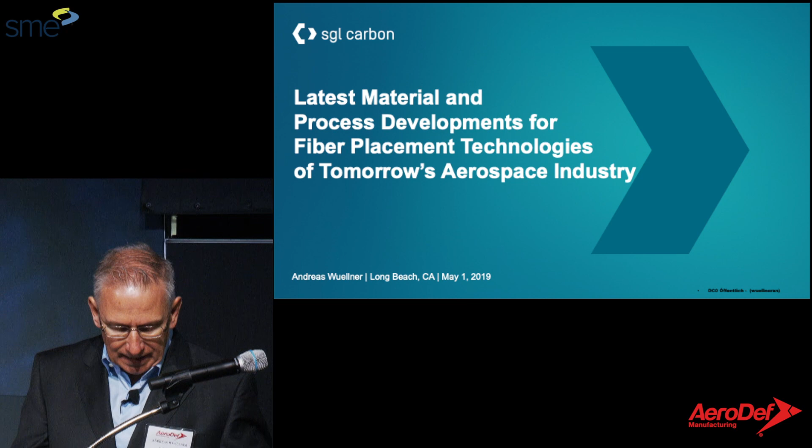A few words on SGL Carbon and us before I dive into this topic. What sets us apart from our perspective? We believe that it's really important not to have just carbon fibers in-house and the materials, be it textiles, thermoset, thermoplastics; you also have to have the component capabilities and the capabilities to manufacture in high series volumes. That's important. You cannot just throw a material over the fence and somebody will pick it up and make a part of it. This won't work. That's something we have experienced and learned over the last years.

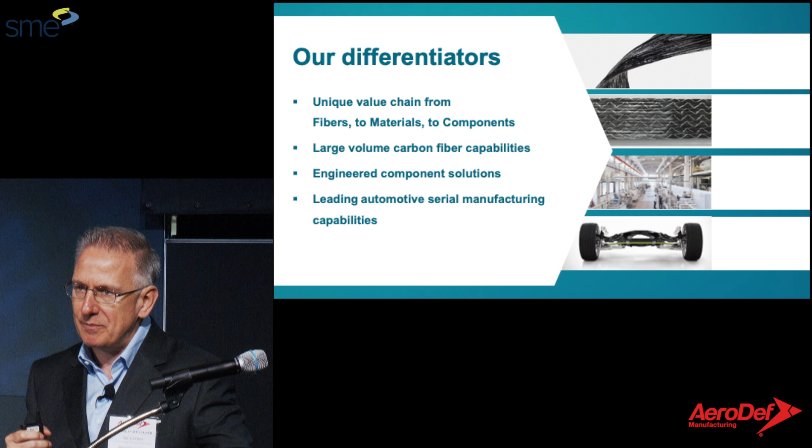We have large volume carbon fiber capabilities. We are among the top 5 carbon fiber producers in the world. We have the engineering and development capabilities in place to develop materials and processes, but also do the engineering work to come to a solution for our customers. And what we are really proud of, we prove daily that we are capable of manufacturing parts in series. The part you see here is the leaf spring, and we're manufacturing for customers more than 500,000 of such springs in standardized manufacturing cells per year. So that's a really serious application.

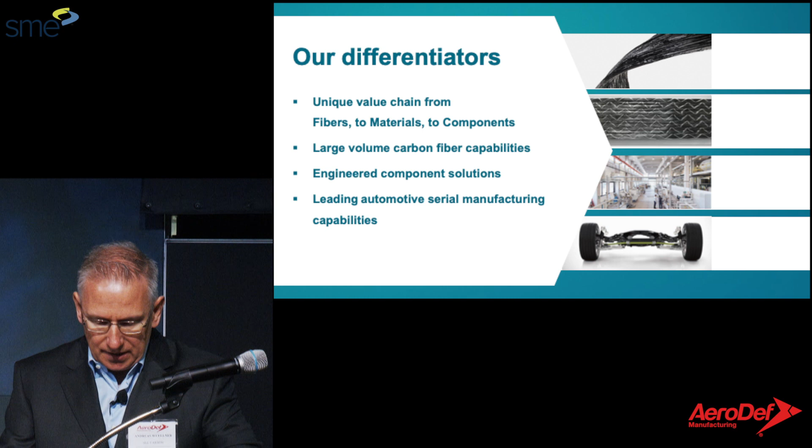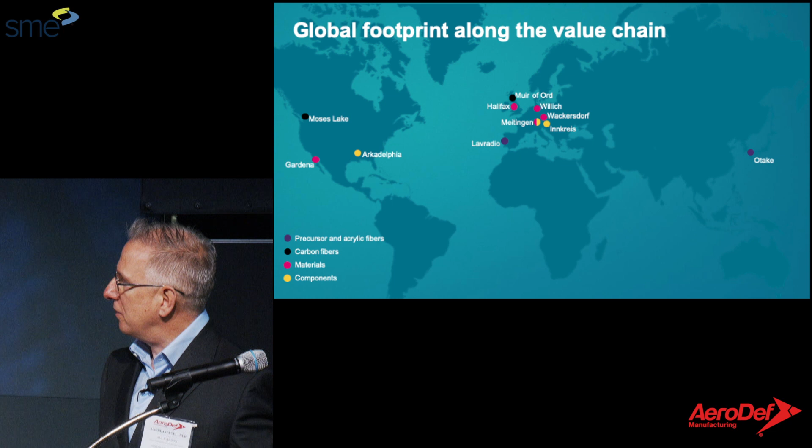SGL Carbon, our business unit, our division, has a global footprint, and as I said before, that starts with the fibers, or it starts with the precursor. Those are our precursor sites. Then we convert those into carbon fibers in Muir of Ord, Scotland, and Moses Lake, Washington State, the plant we started up in 2012, at that time still with BMW. Now it's our plant, and from there, our fibers and also glass fibers are converted in the red dots into materials, and then either sold or converted into parts.

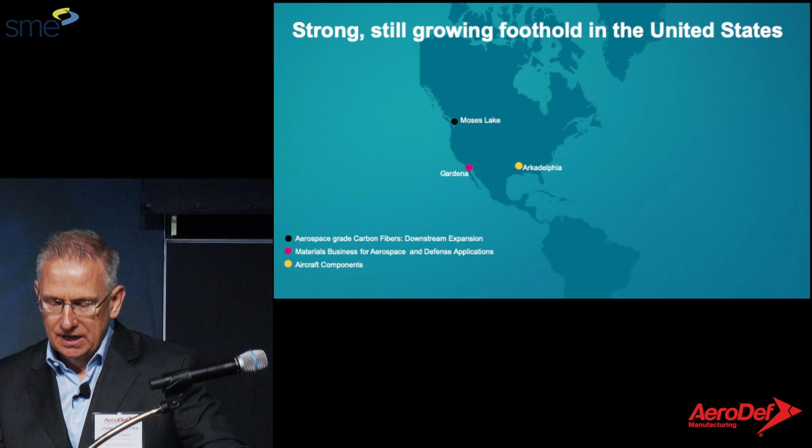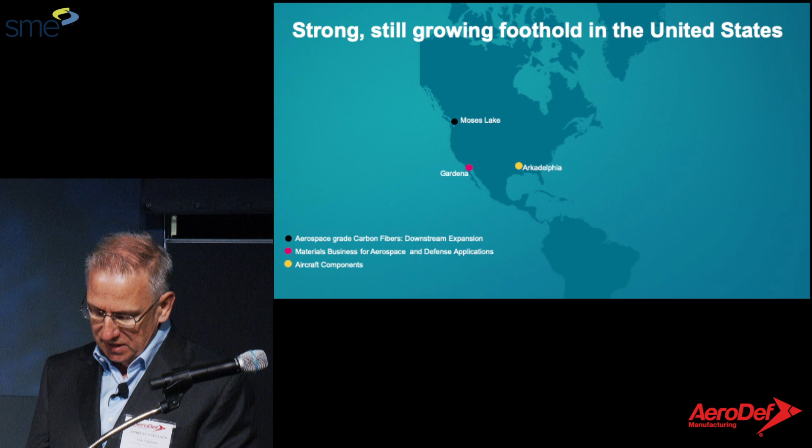In the US, we do have a foothold of 3 sites, one here in Gardena, another one, as I said before, in Moses Lake, and in Arkadelphia. And we will grow this footprint. So that's also a reason for our participation here. We want to grow in the United States. We are currently a $500 million US dollar sales business unit of SGL Carbon.

Okay, let's dive into the materials now. When you talk about composite components, when you talk about fiber reinforced plastic, it's always a combination of the materials, the process, and the engineering. And you have to have all of these in place, otherwise it won't work, and you have to select the appropriate ones.

The materials you see here are parts of our dry textiles toolbox. We always try to develop standardized toolboxes, because otherwise it gets too complicated for us and for our customers. And hence we have started to develop this toolbox, starting with fabrics, non-crimp fabrics, woven fabrics, most cases thermoset. For thermoset applications, we have developed a so-called FixTow material, which we will see later.

That is a material we have developed for thermoset fiber placement applications, non-wovens, which also go into fiber placement, and of course stacks, braidings, and preforms, and we will see those also later on, especially the braidings, which will play a role in future as well.

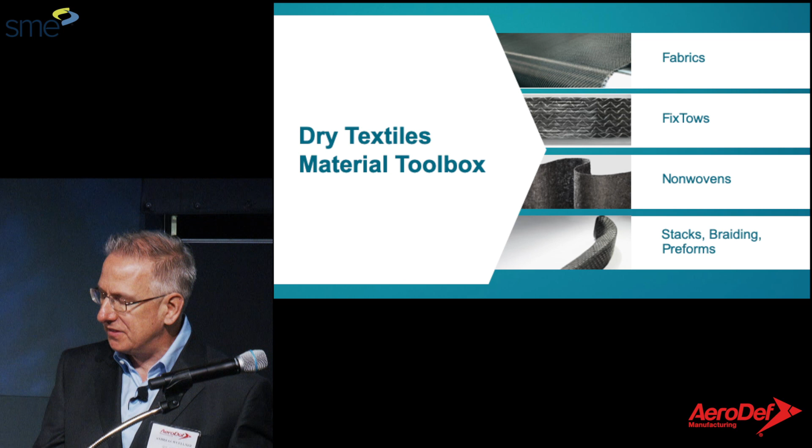That was basically the starting point for us, and from there we developed the thermoset material toolbox, which is, well, when it comes to prepregs, of course, state of the art. But we took this and developed, based on the prepreg technology, towpregs, which are not a slit tape, but we take basically a carbon fiber, we impregnate it right from the beginning, and re-spool it, and make a towpreg out of this, which then is used for fiber placement processes.

In addition to that, we also have pre-impregnated carbon fiber non-wovens. Those materials stem from the supply chain we have for the automotive industry, and those are basically off-cut materials we take and make non-wovens from those. And then we have stacks, and stacks are basically multiple plies of material we put on top of each other, trying to minimize waste right from the beginning, and which then can be put into fiber placement machinery and further reinforced.

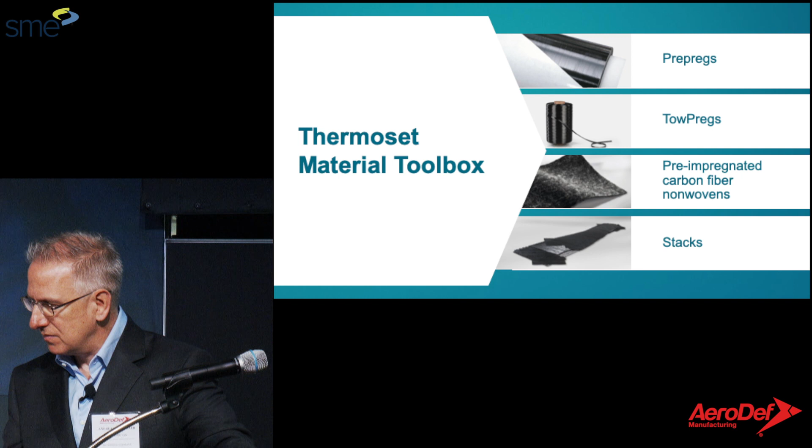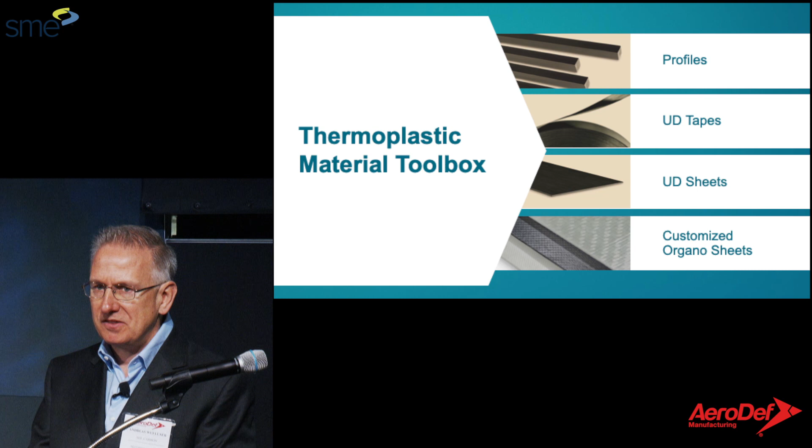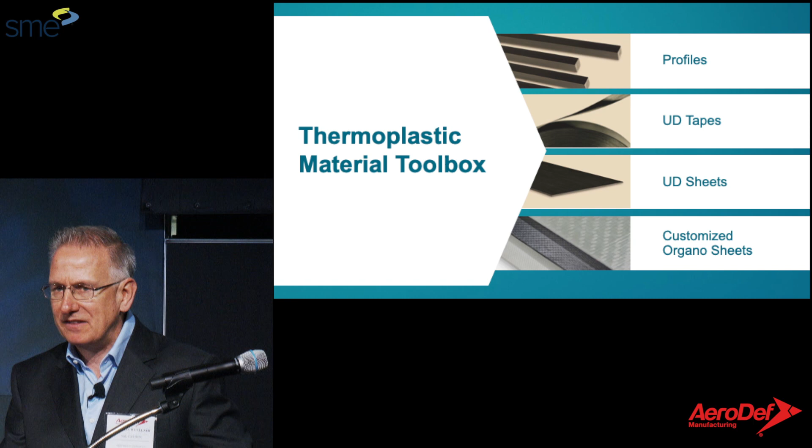So that's another material class we have developed for fiber placement applications. And those are all the basis for fiber placement. So you have to have in place such standardized materials, because otherwise it gets too complicated and you lose sight basically on what you're doing.

As I had said before, for applications where you have one part, large volumes, there are already processes out there. We have those in-house, but when it comes to smaller quantities, much more complex geometries, it gets more difficult, and the waste increases exponentially, and that is really the critical thing with all the applications.

We can compete with our materials, be it glass fiber, be it carbon fiber, be it hybrid materials. We can compete when we minimize the waste. And this is, for example, the case with such glass fiber reinforced plastic leaf spring applications. But when it comes to complex geometries, small volumes, it's totally different.

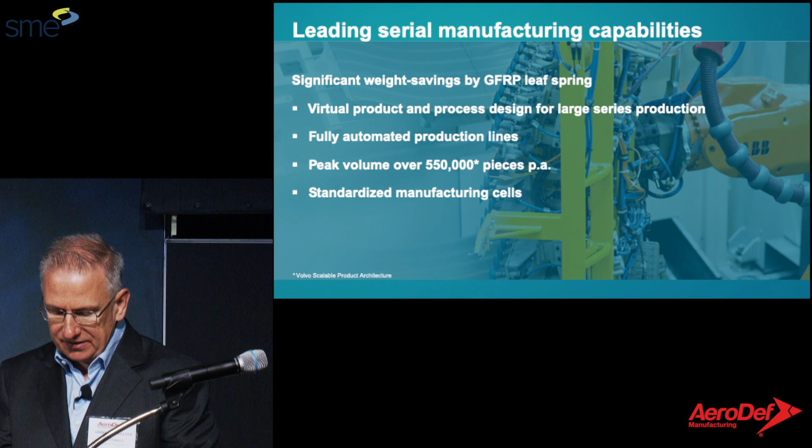And to give you an example for that, that's an example taken from a real-life project we had in the past with a large German automaker. They started with a steel solution, and then they wanted to have a lighter solution, and ultimately, because of cost, they ended up with this aluminum solution. However, we went through various iterations, and those involved fiber placement technologies, and that was basically the starting point for our efforts to think more about fiber placement than we did in the past.

As I had said before, we came from large volume, large parts, either made from wet pressing or high pressure RTM, complex tool geometries, expensive tools, a lot of waste, and we wanted to reduce that. And so I had to start thinking about what can be done. And in the first iteration, well, that was the simple approach: make everything from carbon fibers in the way we did that for other applications. When you look at it, you save a lot of weight, which is great. But when you look at the cost, you triple the cost of the series solution, which is of course not acceptable for the OEM.

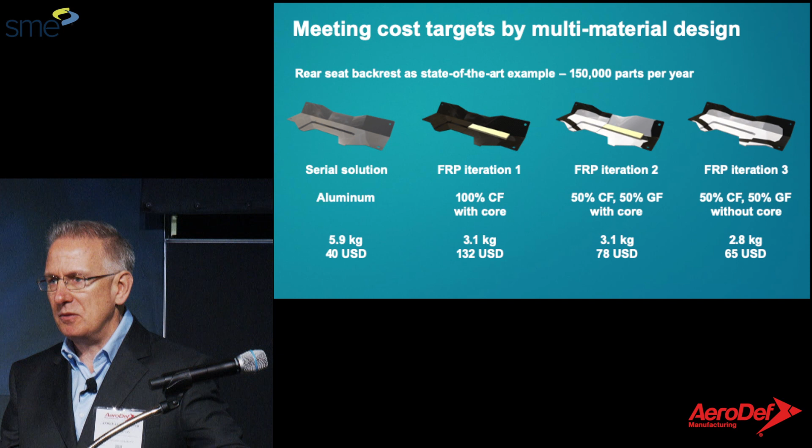Then we looked at it in the next iteration step, and that gives you a feel for the competencies you have to have. You have to have the material competencies, and you have to have the engineering competencies in-house to go through this. We came up with a hybrid solution with a core, 50% carbon fiber, 50% glass fiber. But this was still too expensive.

And the next step was to get rid of the core and make more use of carbon fibers in some specific regions of the part, look at the load paths, and minimize waste again of carbon fibers, but really make the most out of the carbon fibers. And you couldn't have done that with standard processes. And that is a way of thinking. We believe that combining multiple materials and also technologies.

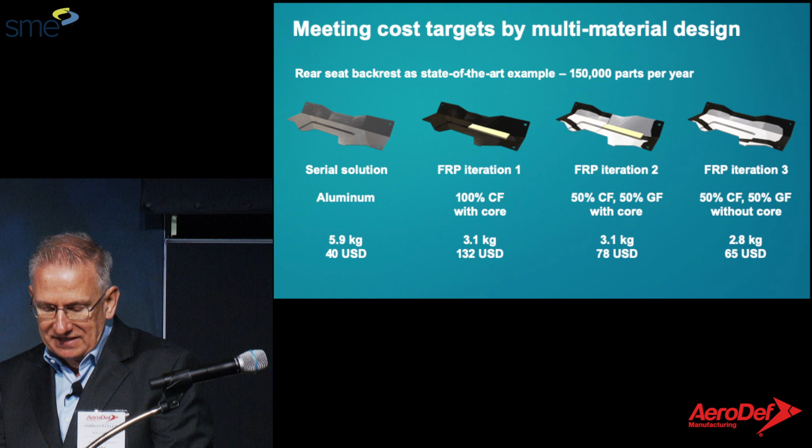So this is a combination of non-crimp fabrics, glass fibers with fiber placement on top of this. And this is something that saves you weight and also reduces cost. So that's a good approach, but it's very complex and very complicated, and you have to

State of the art is a standard approach of using carbon fibers here, making everything out of carbon fibers. But when you compare the cost, it doesn't work out. And with several iterations, you lose some properties, but it's still good enough, and you end up with such a hybrid solution with fiber placement. So that's a good example of how we think and what we want to bring to the aerospace industry as well.

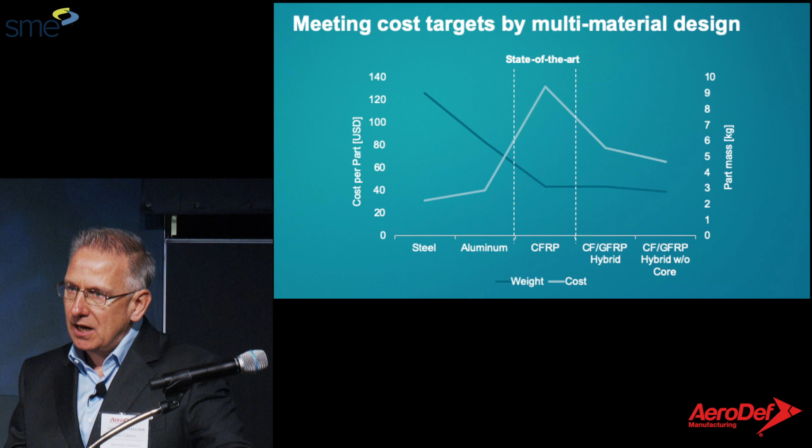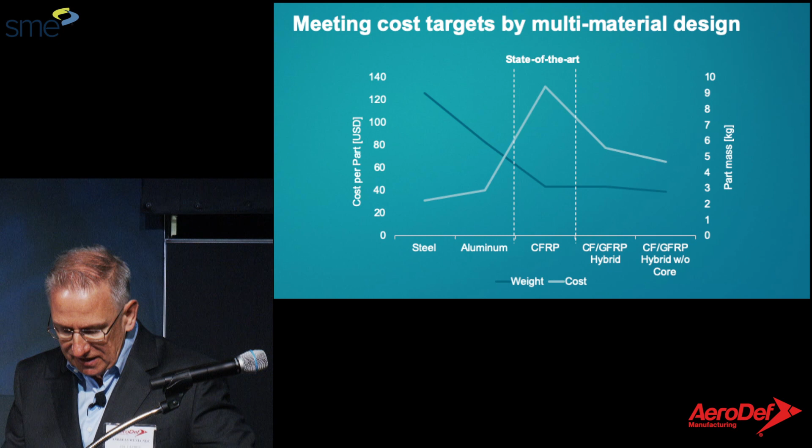That thinking that we can combine several materials, and not only for huge structures as had been done with fiber placement in the past, but do local reinforcements as well. And why is this important? As I said before, the last time I talked about what is happening to commercial aircraft and how we could utilize what we are doing within SGL Carbon in future aircraft to replace our autoclave processes and to make, for example, wing structures with out-of-autoclave infusion processes.

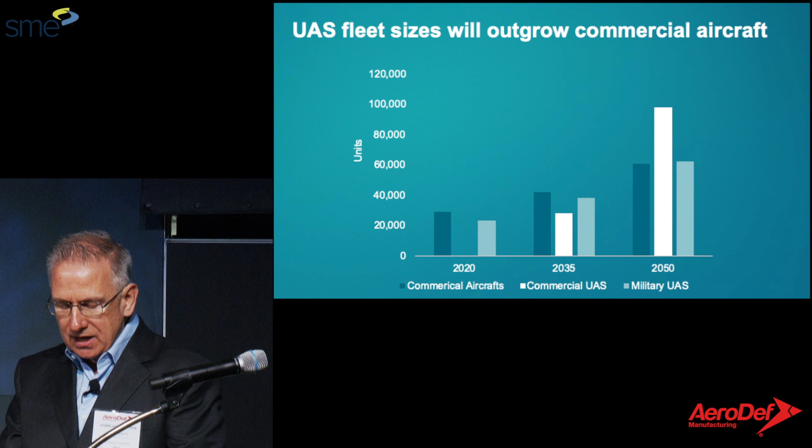But in future, when you look at the developments here, you see that unmanned aircraft systems will outnumber commercial aircraft on a global basis real soon. Now mostly in defense applications, but in future in commercial applications as well. And when you look at what such air taxis look like, unmanned aircraft systems don't have huge structures, huge flat parts. Such parts are round parts. You have a lot of curvatures.

You have, for example, when you look at the doors, a lot of glass. However, you have to reinforce that, and hence you are not able to do something there with standard approaches like we did in the automotive industry. You would have a lot of waste here, and that would make such parts so expensive nobody would utilize fiber reinforced plastics here.

For example, these parts here could be made from braidings. You could have fiber placement for such structures at the doors. So there are multiple areas for such air taxis where carbon fiber reinforcement with fiber placement processes may be utilized in future. Hence, we think this is really a technology, with the further developments we are going into, that should be used in future.

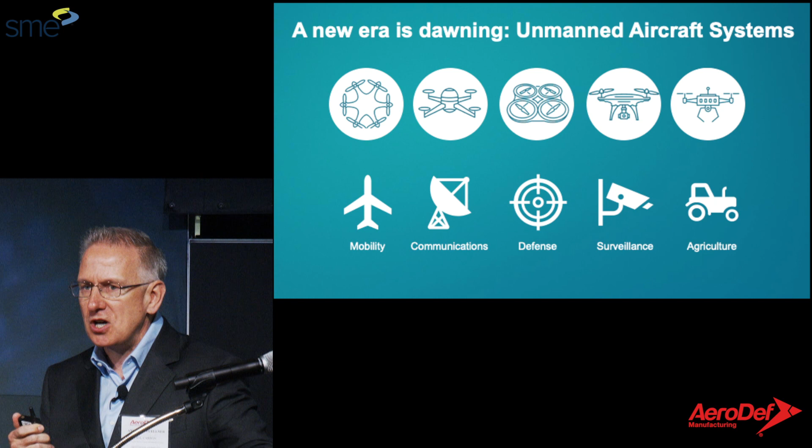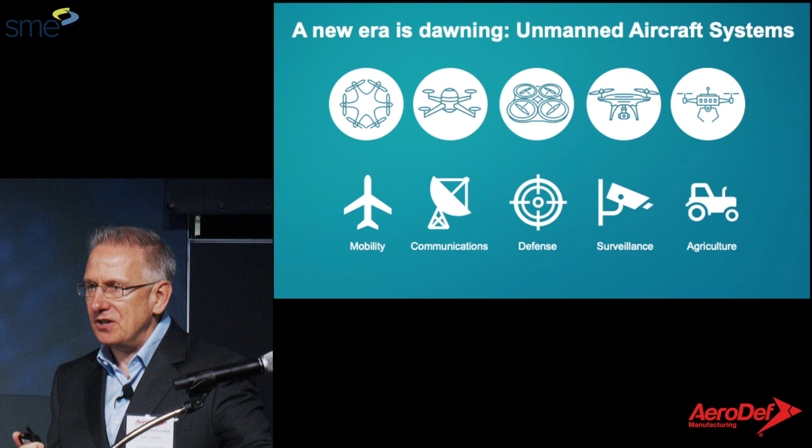And when you look at the different applications in mobility, communications, defense, surveillance, and agriculture, the variety of such drones, unmanned aircraft systems, is so huge that you do not always talk about huge volumes. You talk about limited numbers, maybe hundreds, thousands of aircraft, but that would not allow for very expensive toolings. Hence, you have a huge advantage here with fiber placement technologies.

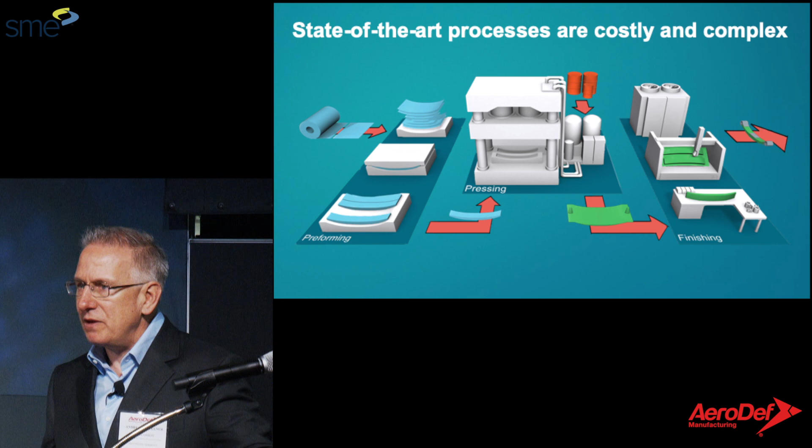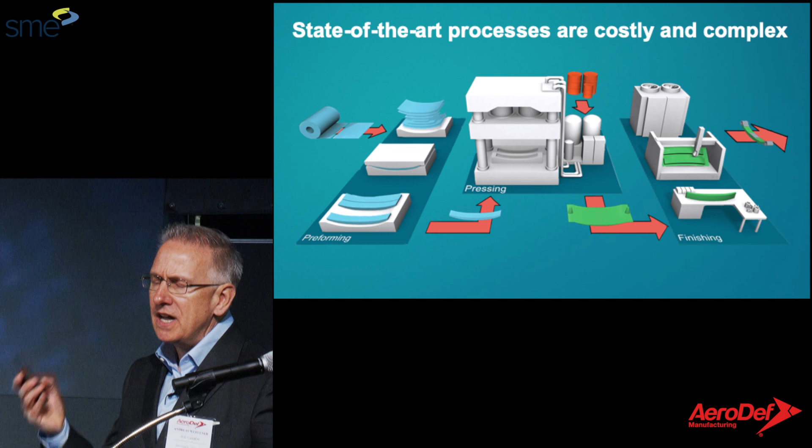You have separate cavities, and then you have to separate those from each other. But this is really standardized, high series, not a lot of variation in there. When you want solutions for smaller volumes and just local reinforcements, you have to go a different route, and that's what we are showing here: either our automated fiber placement processes or another process which we call freeform winding. You take a towpreg and wind the specific geometry with a robot.

So these are specific processes which use our towpregs here, and the towpreg is a thermoset resin system, and you make the part, and afterwards you cure it. It's a fast cure resin system. You don't need the expensive high pressure RTM molds. You save a lot of money in that regard.

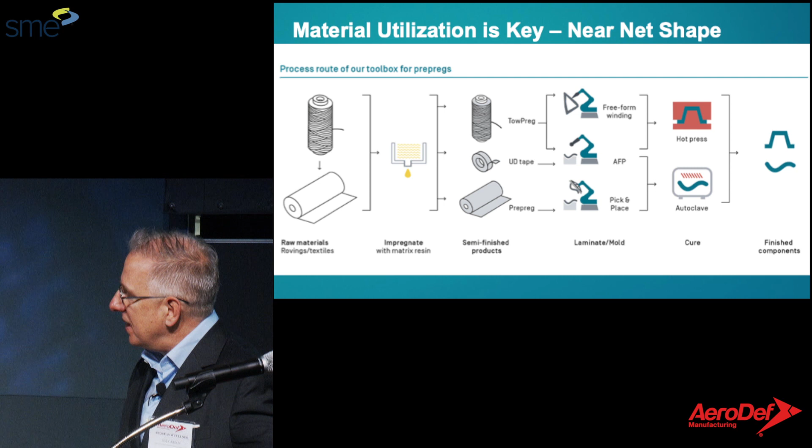And with the towpreg, because of the process here, when you impregnate the fiber and don't have a backing paper on the towpreg, you save money there as well. And it's a very nice process and a nice material for those two processes here. However, here you see the standard process, which is state-of-the-art with prepregs and pick-and-place operations, autoclave technologies. So we believe that this here is the future for applications as we have seen before.

And when you look at this manufacturing setup, you see it is much easier, much simpler. You have the fiber placement equipment. You take either the UD tapes or the towpregs. You lay up the parts. What you see here, you have those parts where you don't waste the material, which is really important. You don't have a stack where you waste maybe 80% of the material afterwards. You lay up the fibers where the fibers are needed.

And then you have a simple press, which is standard state-of-the-art technology. You don't have to deal with high pressure resin transfer molding, which is very complicated, and so that makes it a lot easier here.

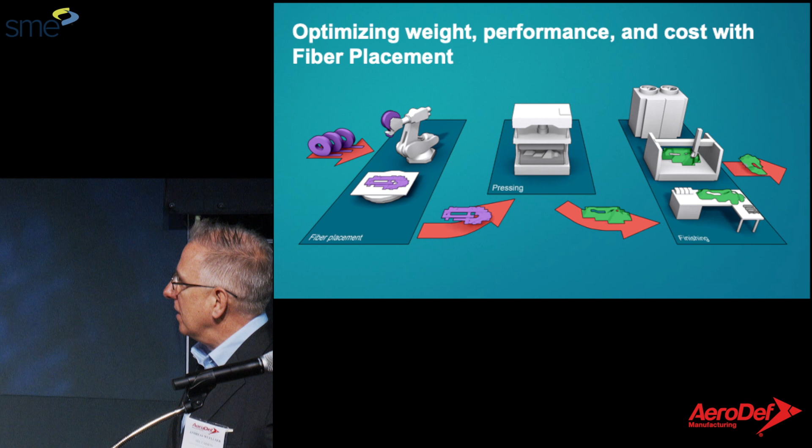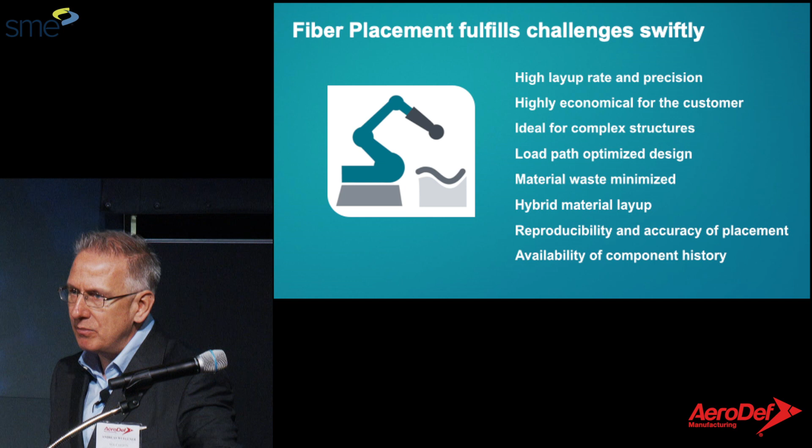And when you summarize the advantages of the technology here, it's really the high layup rate. So the parts I have shown you can be manufactured below 10 minutes or so. That's relatively fast for such parts. The backrest, for example, of a car with high precision. When you pick the right process, the right material technology, it gets economical, but that's a prerequisite. You have to pick the right processes and the right materials.

It's ideal for complex structures. It can be 2.5D. It can be really a complex 3D structure with inserts, with metals. So you can have various materials and parts integrated into such a fiber placement component. Of course, it's load path optimized, and that's what it's really about. Make use of carbon fibers where it makes sense. You minimize the waste, and I've said that multiple times, but that's really the most important thing.

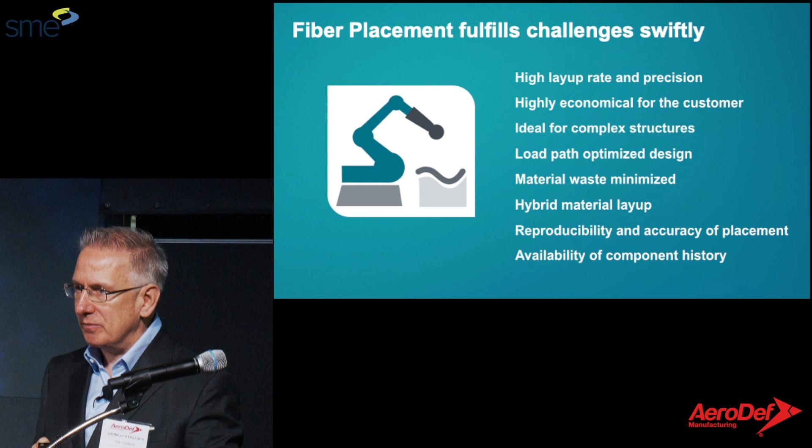You have the opportunity to do hybrid material layup, combining even metals or glass fibers, carbon fibers. And of course, the accuracy of the placement is very good, the repeatability, and you can, of course, log all the information. You have the history available when it comes to virtual processes. Now I show you a movie on what we do in our fiber placement center.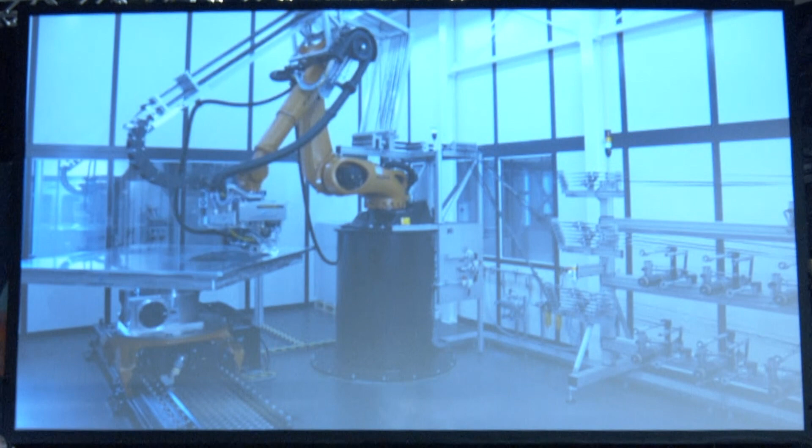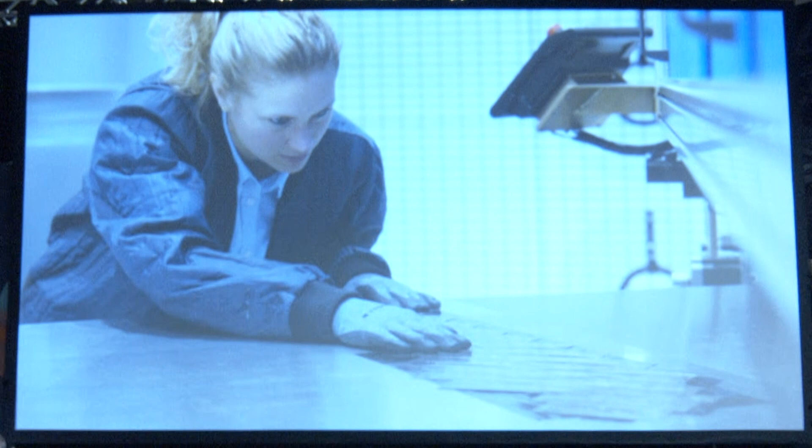Automated, load path optimized, material efficient layup and cutting of fibers plays a key role in industrial mass production. To incorporate this technology into more high-volume applications across industries, SGL Carbon and Fraunhofer IGCV founded the Joint Fiber Placement Center, with multiple locations in Bavaria, Germany. With different high-tech machines, our customers can develop production concepts for fiber placement technologies.

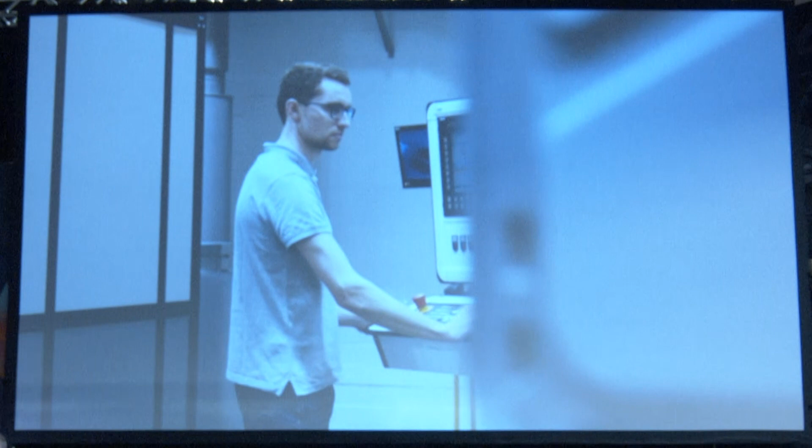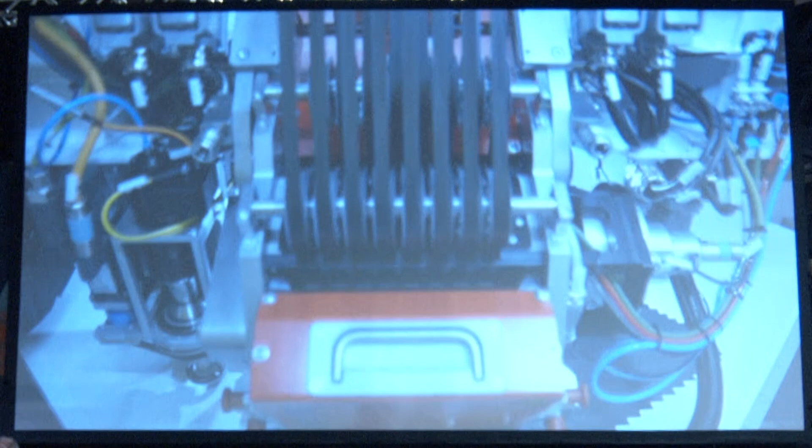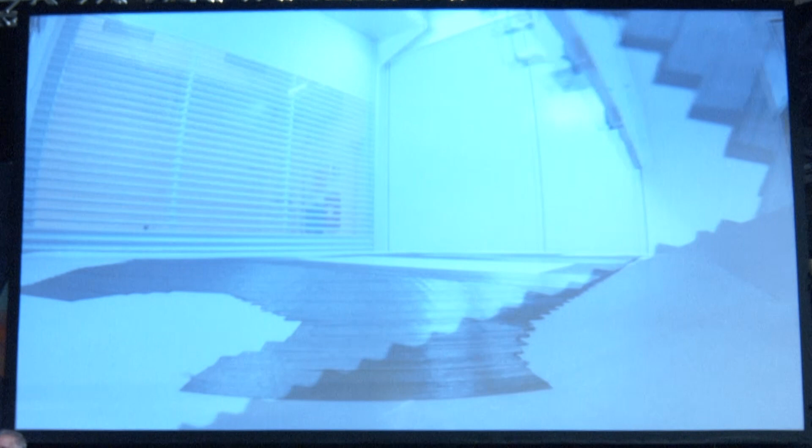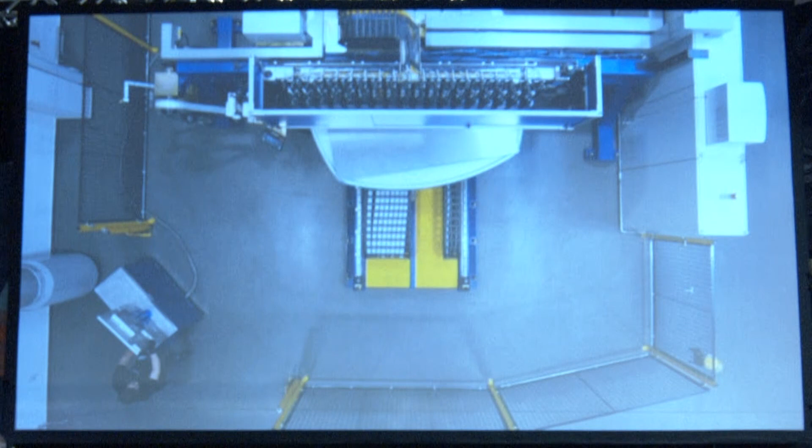Specially developed for mass production, the CNC-controlled Stax Compact 1700. The machine enables towpregs and thermoplastic tapes to be automatically and reproducibly routed away from the spool, very close to the desired final contour. The FiberForge Relay 2000 is a tape-laying system for advanced thermoplastic composites. The system allows for different material combinations and widths, and manufactures tailored stacks highly productively.

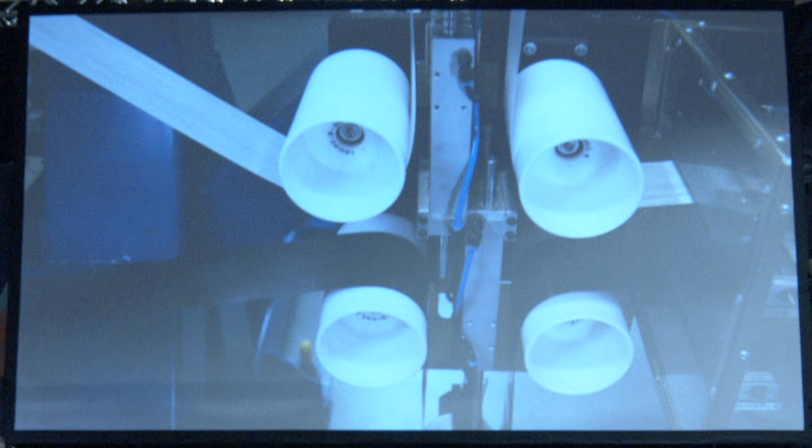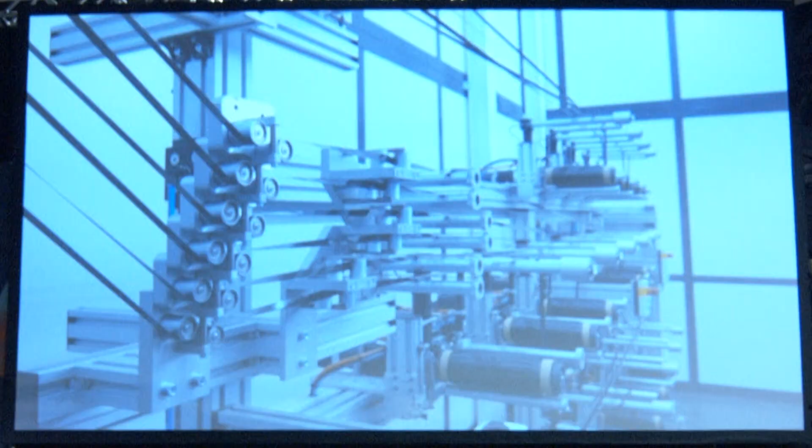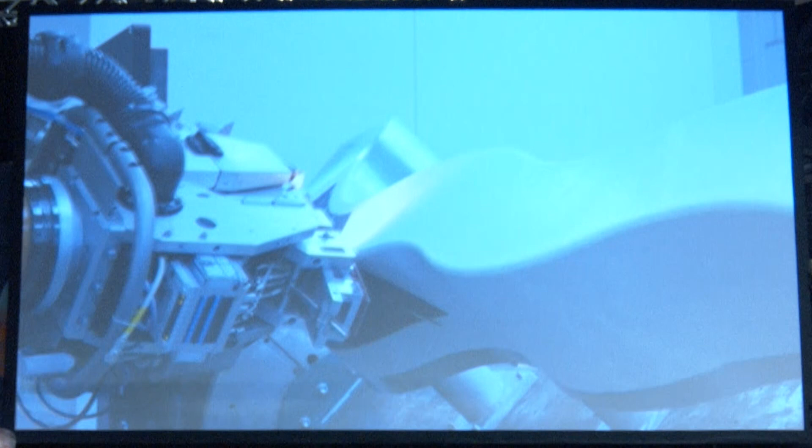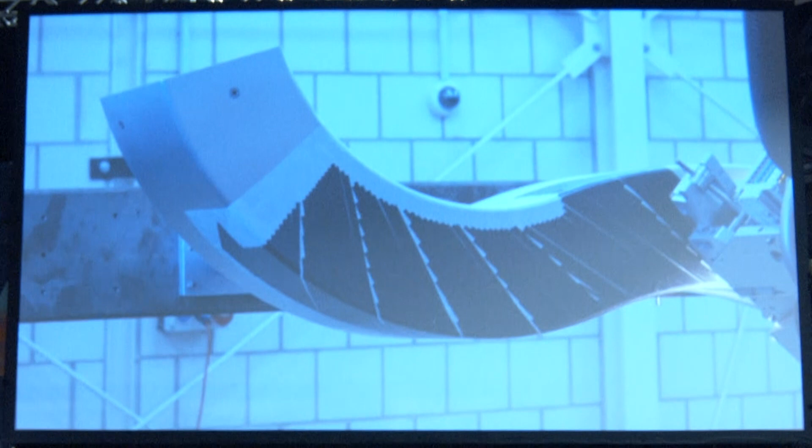For the layup of thermoplastic tapes, the Compositence RoboMAG is a robot-based machine. The material is only fixed on the edges of the part geometry, enabling fast processing speeds and high layup rates. This machine enables multi-material processing of thermoplastic tapes, towpregs, and dry fibers. The Coriolis Composites C1. It is suitable for 2 and 3D part geometries and features load path optimized layup of composite components. The Fiber Placement Center, developing solutions for innovative manufacturing.

In 2016, we started to think about setting up something like the Fiber Placement Center. And we did that because we became aware of the challenges here. And the challenges were really selecting the appropriate material and doing all the engineering work, doing the in-process control, doing the programming side, the CAD/CAM. All of this was quite challenging, and we felt that there are quite a few innovative solutions out there, but when you go to one of the machine suppliers, you get one solution, and of course this solution is being marketed as the most appropriate solution.

However, that's not the case, and hence we said together with Fraunhofer IGCV, it may make sense to form an alliance here and really get all the existing technologies, combine those, and give our customers, our partners, the opportunity to look at such technologies and compare the competing technologies, and learn from us how they can find a solution for their specific challenge.

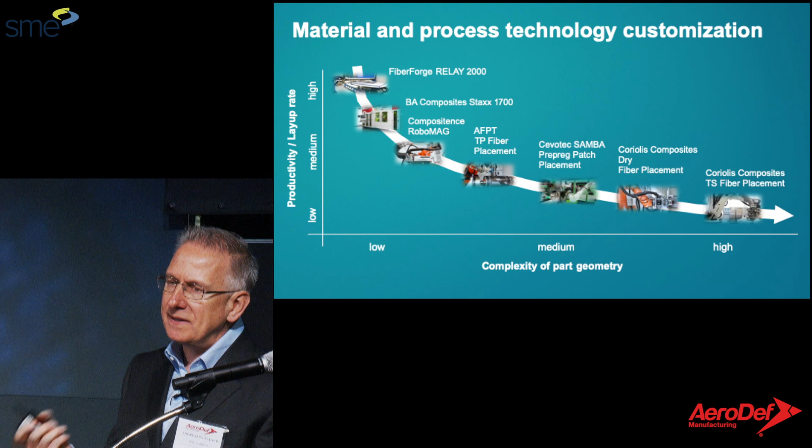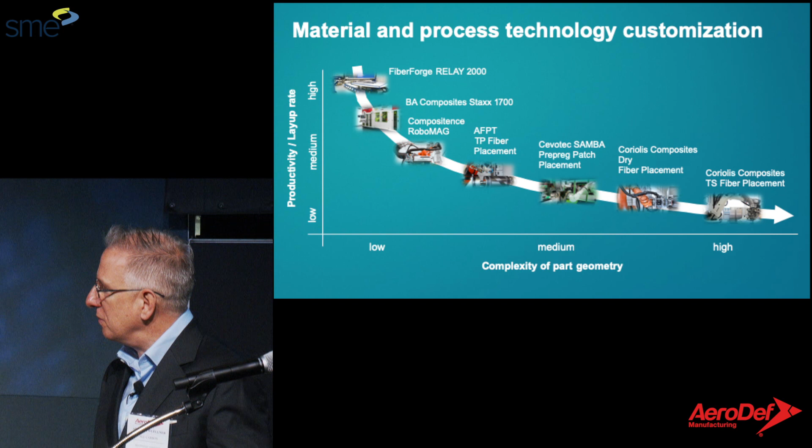And think about as a user, you have to make a decision which equipment to choose. It's really difficult, and that is the reason why we said it makes a lot of sense to bundle our competencies here and to offer this to the customers. This is really, we believe, a good approach to demonstrate how fiber placement can be used in future, and in particular in applications like the aerospace industry with unmanned aircraft systems.

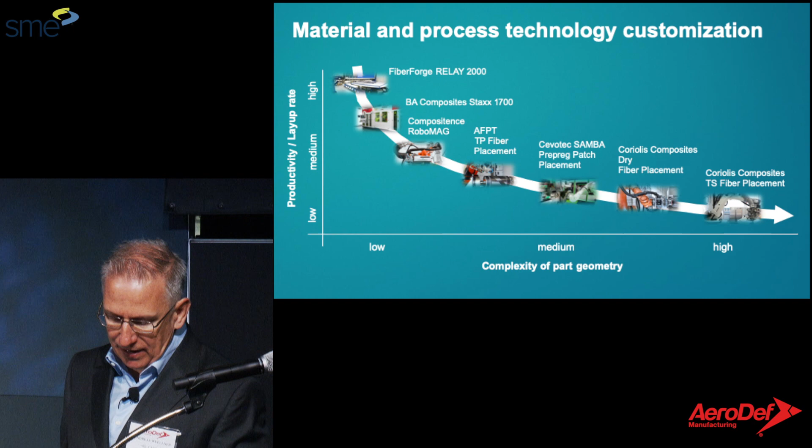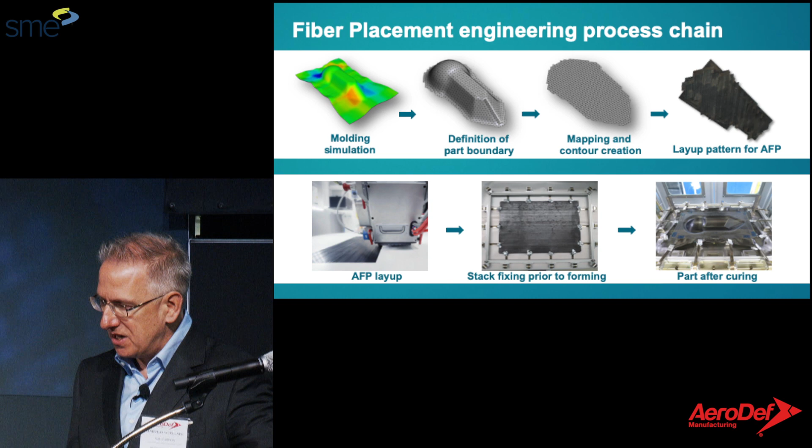Of course, you may not forget about the engineering process chain, which is very challenging as well. How do you get from a part design to basically the layup pattern? And that is very challenging since most of the equipment suppliers offer their specific solutions, but those are proprietary solutions. That's definitely a challenge for the future to come up with more standardized solutions there in order to not only have the virtual chain, but also have it in reality then. That's something you have to manage. You have to do the entire design and engineering process.

And we believe that you have to master 3 different parts of the equation. That is, of course, the material toolboxes. Hence, we have set up the textile, the thermoset, the thermoplastic toolboxes. You have to add the engineering competency, really coming from the concept study, going through product design, the analysis, the prototyping, product testing, and you have to have the component processes in place. These are processes we have in our Lightweight and Application Center, and here such processes in the Fiber Placement Center. And you have to do this in order to meet the requirements.

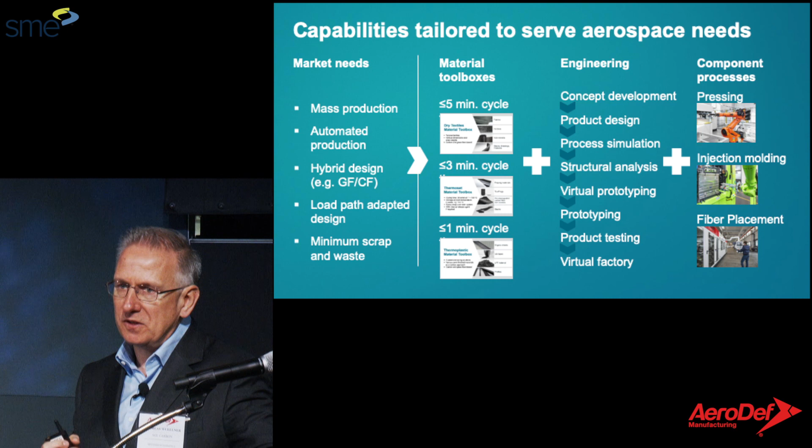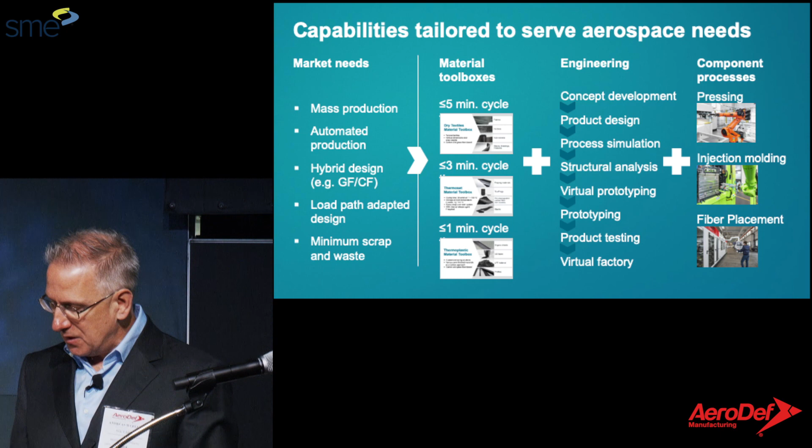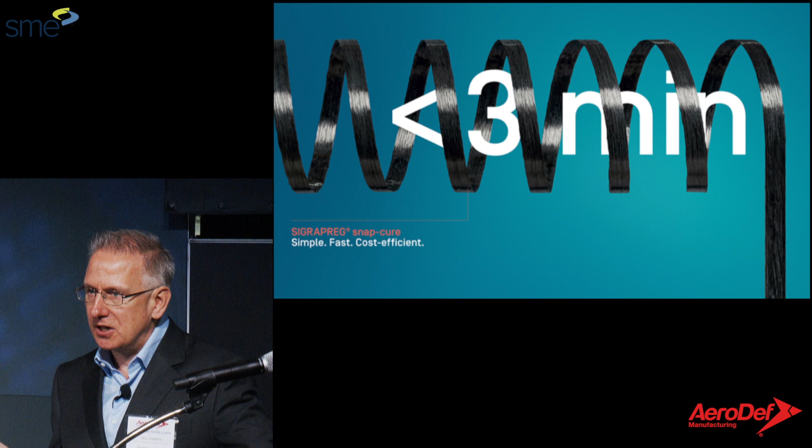The requirements are, as I had said before, if needed, mass production, of course, automated production, and hybrid design. Use carbon fiber only where it makes sense, and do not go overboard with the use of carbon fiber. Mix it with glass fiber, mix it with other materials, do load path adapted design, and minimize, of course, scrap and waste. And when you do this, then you can come to very fast solutions, and in some cases even come down to this 3-minute takt time here for some applications.

However, I strongly believe that fiber placement is a key technology for the future, and with innovative materials like Towpreg or new thermoplastic materials, this is a good basis. And with all the different machinery and equipment which is currently being developed, it is really challenging when you look at the mind-boggling amount of solutions, of processes out there. And if I were in the shoes of a user, I would be confused, and making a selection is really difficult. So I believe that is one of the biggest challenges, really, to pick the appropriate equipment, to pick the appropriate process.

Another thing is the design process, which requires virtual development tools, which are not yet standard. That's another challenge to automated fiber placement, to a higher penetration of fiber placement. And of course, integrating all these new technologies into the existing digital landscape in an enterprise. That is something which is also quite challenging because of their proprietary programming software packages to come up, for example, with a CAM program, with the code to lay up the part. These are all solutions which you have to implement in parallel to the already existing solutions.